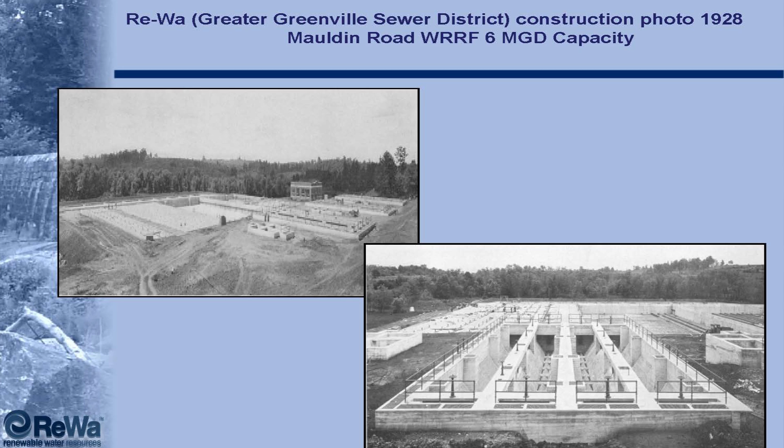Come on guys, stop looking at your phone, give me an answer, how much? $750,000? Okay, that's pretty good. All right, who's next? No, you can't go. Are we down? What were you at? Is anybody in here, we had one more engineering firm. The gentleman on the phone trying to figure out the answer, you can't look this up on Google, sir. Now, girls, give us the correct answer. $4.25 million? We're not going shopping, girls. 1.25? Guess what, America, who was close is 625,000. Give the prize to them. All right, awesome, that was the cost.

Everybody kind of knows where we're at. We're in the upstate, we're in 5 counties. We have 8 different treatment facilities and 62 pump stations.

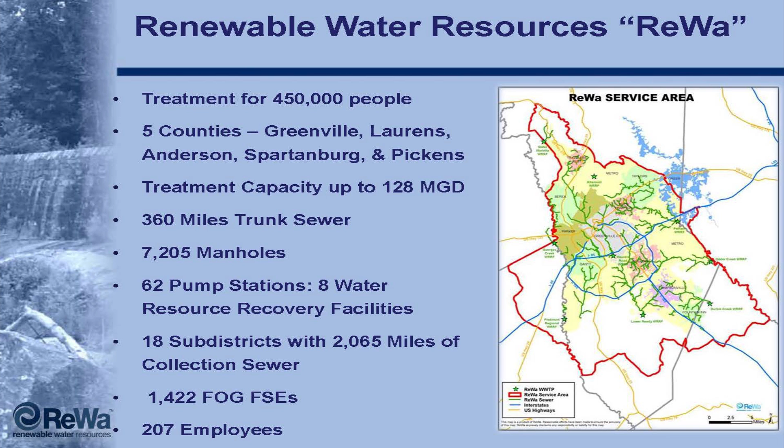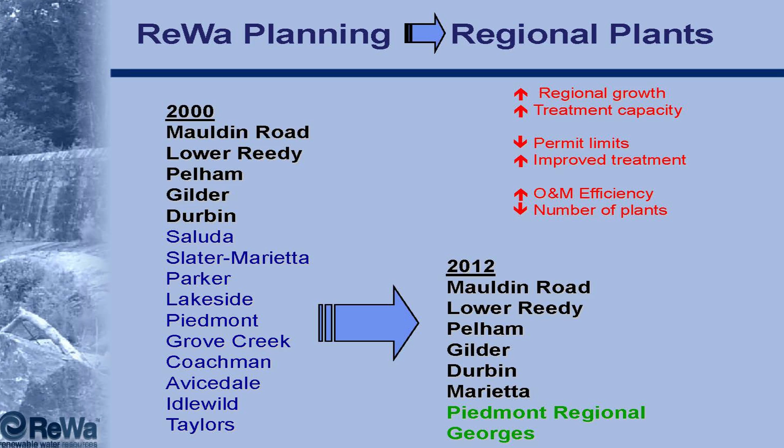I can skip all this because you know who we are. A little bit of our regional planning I will talk about. In 2000, we had all these facilities. If we had a little list over here of the 90s, you would see it all the way down to the floor, because in the 80s we were 38 facilities, but we regionalized these facilities. In 2012, we're down to 8. And I wish we could pump that one Marietta plant, but we cannot at this time.

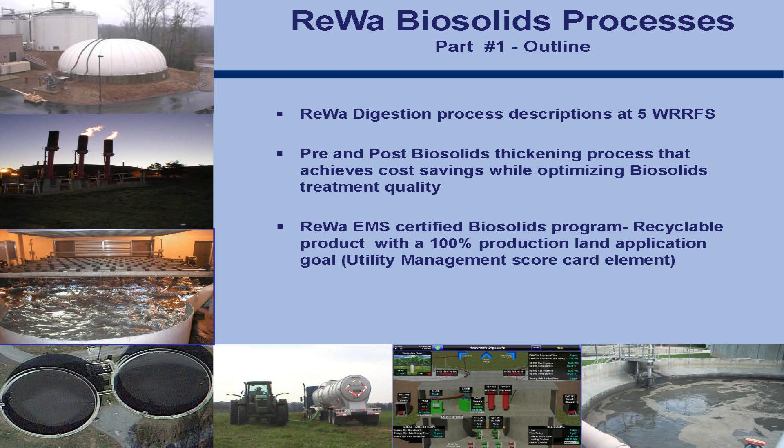So we're going to talk about digestion and what we have, and we're going to talk about the 5 facilities where we have anaerobic digestion, okay? We're going to talk about thickening, how it's important to us and why we do it for the savings.

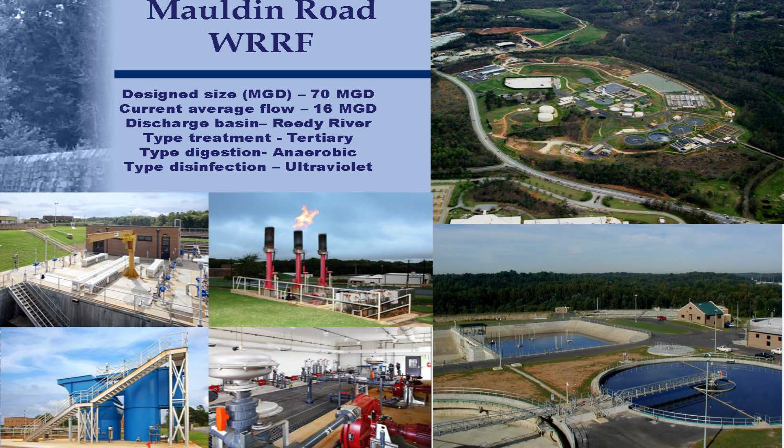Stormwater, exactly. And guess what else they collect? Grit, yes, the magic of grit and what it does. And we'll see that in just a minute. But at this facility, we have UV treatment. It was the first biological nutrient plant in the state for phosphorus. And we're going to look at some of the things there.

But first, we're going to talk about anaerobic digestion, which was put in the 40s at this plant. There were 4 digesters built. We're still using those tanks, and you can see those tanks. We have got our money out of those tanks. I just wanted you to know. That's when they really built tanks, by the way. And then we had 2 additional anaerobic digesters that were put in the 70s.

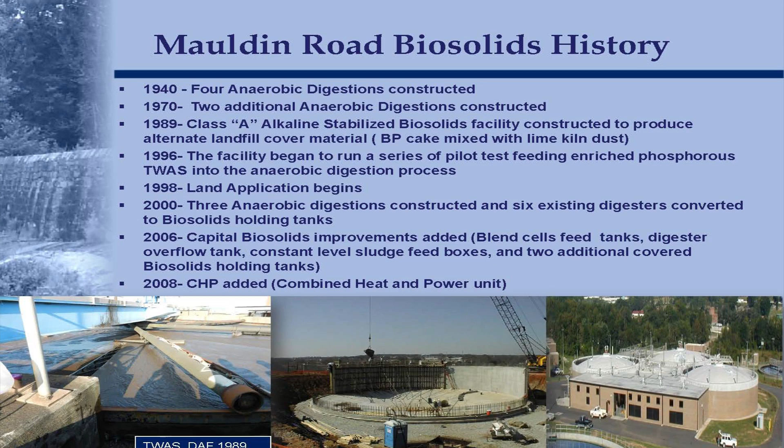And then all of a sudden, during the 80s, there was a huge phosphorus problem. There were big algae blooms in Lake Greenwood, and what happened then was, hey, guess where it comes from? It comes from the Reedy branch and Saluda branch running to Lake Greenwood. So Lake Greenwood had these algae blooms, and what was mandated was that we went to biological phosphorus or chemical phosphorus removal at the Mauldin Road facility.

Our primary clarifier sludge went over to our digester, and our thickened waste activated sludge from our biological membranes went to a DAF unit. Why did it go to a DAF unit? It's biological phosphorus removal. It has to be aerated. So if you'll see the picture right here, you could see that these were the DAF units that we floated the TWAS on, we pressed them out, and we mixed them with lime kiln dust. Okay? We made an A-class product.

That A-class product was used at the landfill for daily cover, which was somewhat problematic at times, but we had an A-class that was with the lime eating through everything we owned and the employees.

No, I'm just kidding with you. That was a joke. All right.

So if we go on with this, those 2 things are separated. So we took the primary clarifier sludge that went into the anaerobic digester that became biosolids, and we started the land application program. We were doing this at Durbin. You'll see the facility in a minute. So in '98, we started land applying that. We had a B-class land application on this side. We had an A-class on the other side with the TWAS.

So what happened during that time is we said, look, what we really need to do is look at whether we can put TWAS in an anaerobic digester and have that release of a side stream of phosphorus back to this facility. And we did a series of testing for about 6 months, and it really worked well.

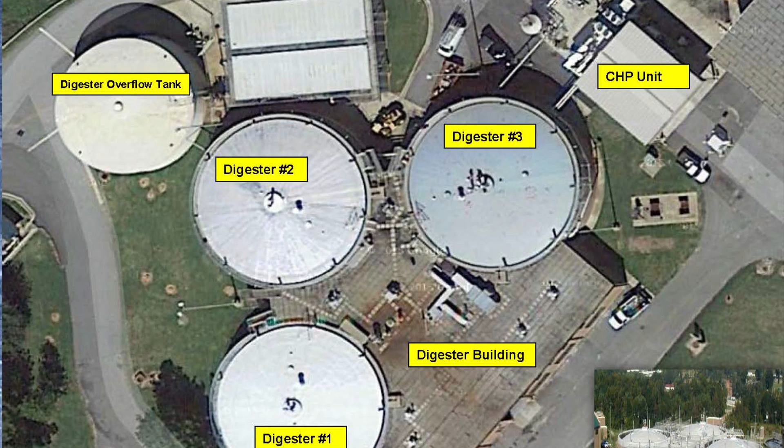So in 2000, we built 3 brand new anaerobic digesters that really, thank you Hazen and Sawyer, because you're going to see something awesome in a minute. They're going to shine on this one little building design that is awesome, and it's actually right there in your corner, right here. The building contains the digesters, the pumps, the heat exchangers. Everything is in that building, even the GBTs. Really neat design, and there's the digesters being built.

So in 2006, we did even more for the capital improvements. Blend cells were added, overflow tanks. We made the digesters constant level digesters, even though they still had the floating lid. And we did 2 additional biosolids holding tanks. In 2008, we got tired of burning off that gas. There were funds available through shovel-ready projects, and guess what? CHP was born. All right.

So just a little look at Mauldin Road at the headworks. We have the primary clarifier sludge, as I said before, that currently goes into the anaerobic digester. We have the waste activated sludge, thickened, of course, that goes into the digester. Then we thicken coming out, and we'll explain a little bit of that in a minute, to biosolids, and 100% land application is what we try for at all our facilities. And we're doing that again now after the PCB, and we'll talk about a little bit of that.

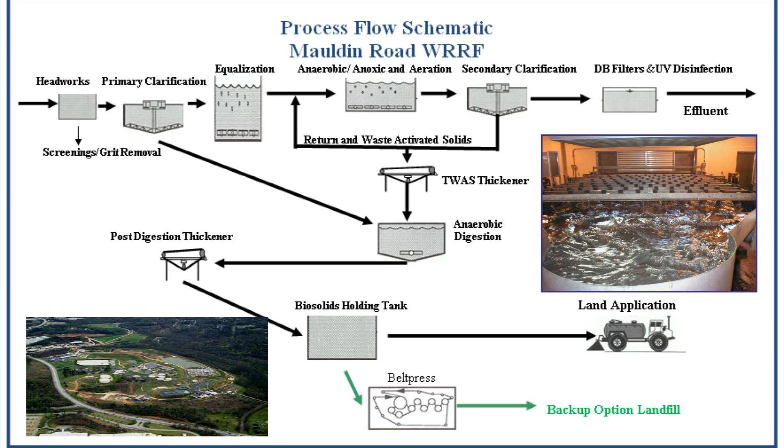So you can see from above, here's the Mauldin Road facility. This side's active. Here's your digester complex. A little bit up close, here's your digesters. Now we have the addition of the CHP. We'll see that in a second. Here's your building. It contains everything. And then we have a constant flow that comes off of these digesters if they're active, that comes to the overflow tank, is thickened, and then goes to the biosolids holding tanks. And here are our digester feed blend cells that we do different things with.

And those are actually designed because we had some issues with foaming and loading, and we thought, is it the grease, is it this, or is it that? And we'll go on with that story in just a second. So here's the biosolid storage we added at 5 million gallons, covered biosolid storage, and here's the 1940 tanks that are still in existence that we use for backup.

During the winter, if we're land applying, it gets wet, guess why? We don't want to run the belt press. Does anybody take a wild guess of running the belt press versus land application, what it costs? What would you say? How much did it cost? No,

in some scenarios, it's 50% more. That's a lot of money, taking it to the landfill, pressing it. That time, the trouble, the upkeep of the belt press, is when you don't have that expense. We have all the land, and we'll go through with that too. So here's the old tanks. Here's the primaries that were built in the 70s, and the in-ground bunker secondaries that were from the 40s.

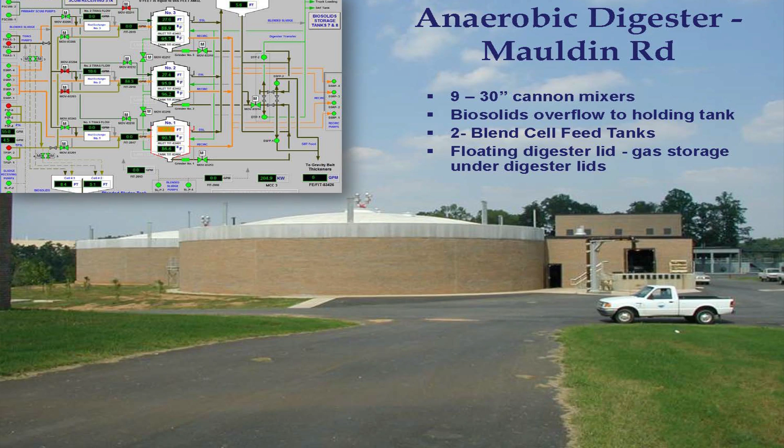It's really good that they run and they're designed to run at X amount, but how about when you get X, Y, Z, A, B, C, and D all at one time? That initial flush of that huge line, when you have these huge rains, is going to push some of that grit over into the primary clarifier, and guess where it's going to end up? Either here or the holding tank. Depends on what's better mixed, right?

So we have the floating lid. The gas storage is under these lids at this facility. Like I said, we have the cannons, the big bubble cannons that actually take up with the gas a big huge bubble, and they come up to the top. And here you can see a little bit of that at these levels.

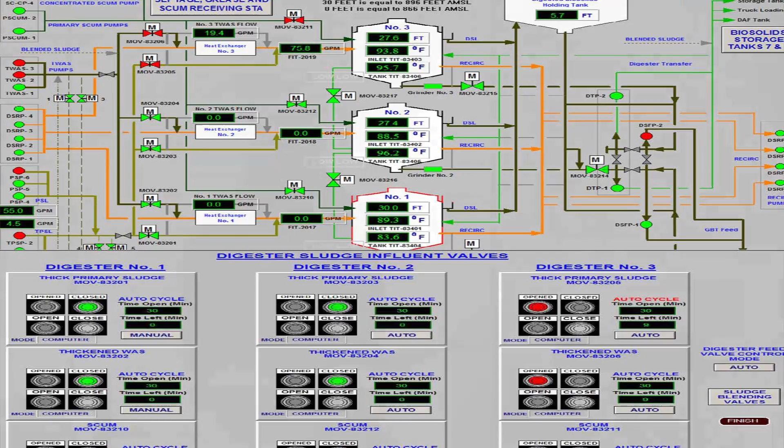Here's our digester SCADA. This is what we're looking at, and it looks easy, doesn't it? It really is. It's not complex. You know why it looks easy and how it is easy? Nobody ever does anything to it. It just runs. Because right here is our feed cycles for the digesters. And you put them on how many minutes you want it fed, if it was primary clarifier sludge or scum, and guess what? I don't think these things have been changed in the past 10 years, because they run so well. And there's 2 running now, not 3. I took this picture when there were actually 3 running.

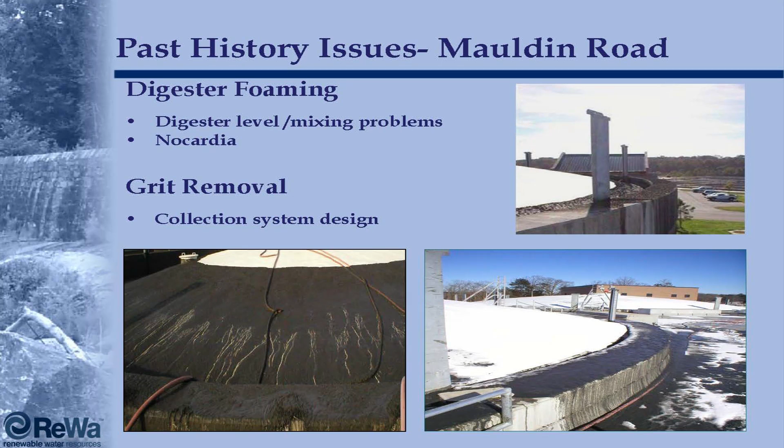Past history issues. The big thing was the level and the foaming. Okay? We can sit here and cry. We can sit here and roll on the floor about foam all we want. It's just one of those issues. But when we first got the new cannons, that was the thing. Because the operators were scared of the level that the digester went up, and they were in tune to run that digester at more of a low level. And guess what? The cannons, they were a little bit under or right at the cannons, and they weren't great mixing. They were just foam generators. And all of a sudden what they wanted to do was go cut off the mixing, because guess what? It was foaming everywhere. That was a nice snow picture, wasn't it? But what would happen is we would have that issue.

The other thing is Nocardia. Nocardia in your biological treatment will devastate your digester. We had a lot of issues with that. In fact, before the PCB issues, we had grease haulers come in droves, and they would put that into the headworks, and guess what? That grease would travel down to the primary clarifier, kind of go over the weirs of the primary clarifier, because the scum beach couldn't handle it. It goes out to the biological treatment, and guess what? We would develop scum during some times of the year, and it would be Nocardia. And that Nocardia would be fed to the digesters, and you would have issues. Those are the issues.

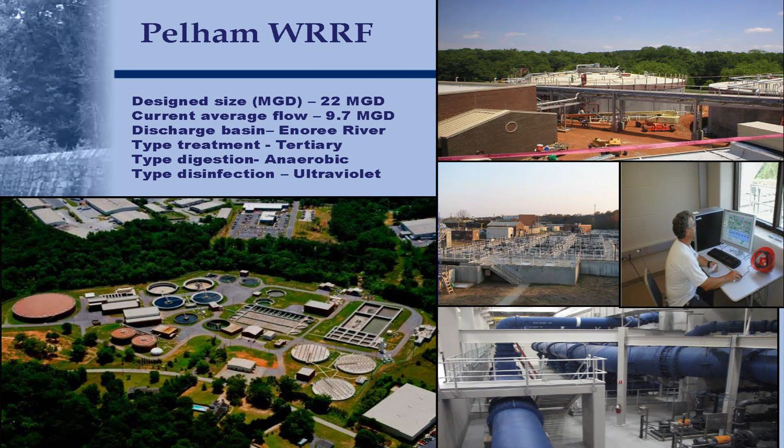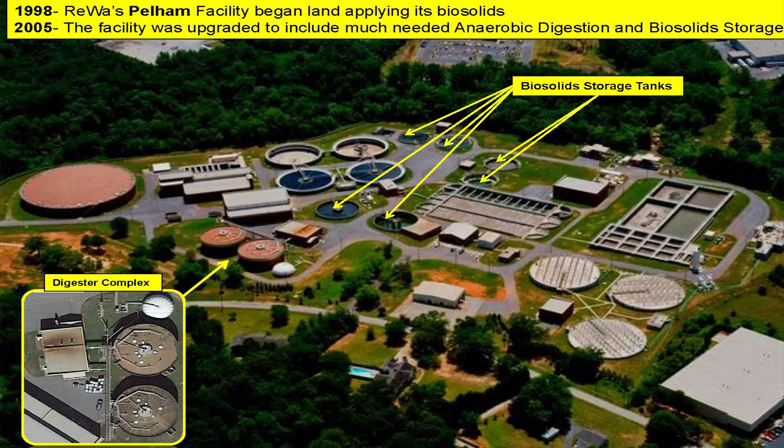So the Pelham facility is our second largest facility at 22 MGD. It's close to 10 now on the average. It's located on the Enoree. It's not biological phosphorus. Tertiary treatment, anaerobic digestion, and UV treatment. Here's a picture of our biosolids holding tank and our digester complex. In 1998, there was aerobic digestion, and we started our land application process here as well with belt press backup. In 2005, the plant was upgraded to include new primary clarifiers, anaerobic digestion, and biosolids holding tanks.

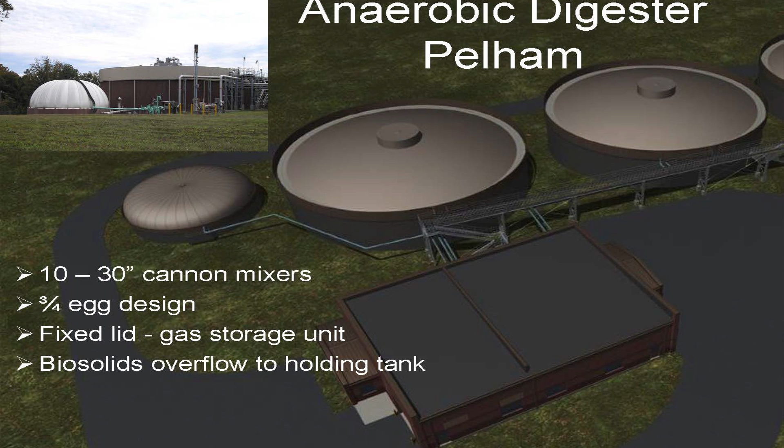So we learned from our foaming issues at Malden. So a lot of little things: we put fixed lids in. We had a 3/4 egg design here. Biosolids overflow with that fixed box, same thing we put at Malden. We overflow to the biosolids holding tank. And there you see what we just talked about, one of those nice membranes.

And I said yesterday, you didn't say it, but I'll say it today. We were scared. The first thing I said is somebody's going to take a gun and somebody's going to blow us all up. But Jared did explain that you can't do that, okay? But that's what we thought. And Jared, by the way, if anybody asks you where you work, tell them you work at the jewelry store. That'd be awesome. Yeah. No, the flaming arrow would be safe too, wouldn't it, Jared? Yeah, it would. There's protective membranes over there.

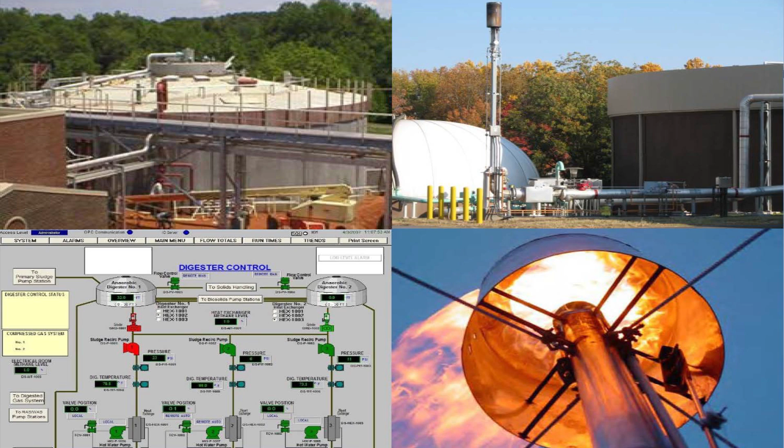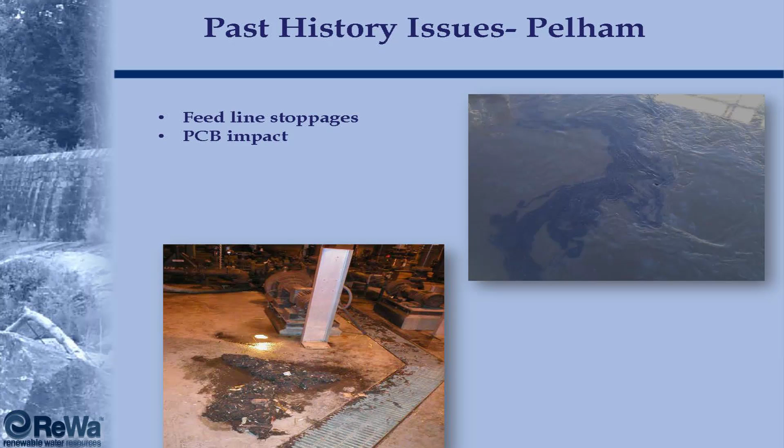Okay, here's a little shot of the SCADA system and the plant control there, and a few other shots of your waste flare and the top of your digester fixed lids, the way they look. All right, past history. You have stoppages at times when you have screening issues. This facility has been one where we have fine screens up front. Guess what they were doing? Large rainfalls, they were jumping the gate, they were not adjusted. Screenings go back into the primary clarifier, go into the anaerobic digester, and there's lines. And then you have the magical black fairy dust that comes in and you didn't know where it came from.

But everybody's heard of our PCB issue with the hauler that came in with his nice little truck and backed up to some nice established restaurant and said, "Hey, sir, could we pump out your grease trap?" And they said, "Yeah, go ahead and pump it out." And he would come with a nice load of PCBs and he would blow it out into the sewer line and they would magically float down to our plant.

But here's what happened. We put frac tanks at Mauldin Road. Everything goes to Mauldin Road. We would test each frac tank before we released the grease right into the digester. So guess what? The grease was not going to the primary anymore. It was going directly into the digester. So Mauldin Road always had scum, right? Seasonal scum. As soon as we did this at the Mauldin Road facility and took that grease load directly to the digesters, they have not foamed. The tops of the aeration basin have been just crispy white, like they should be. So eliminating grease from the biological system has done wonders there.

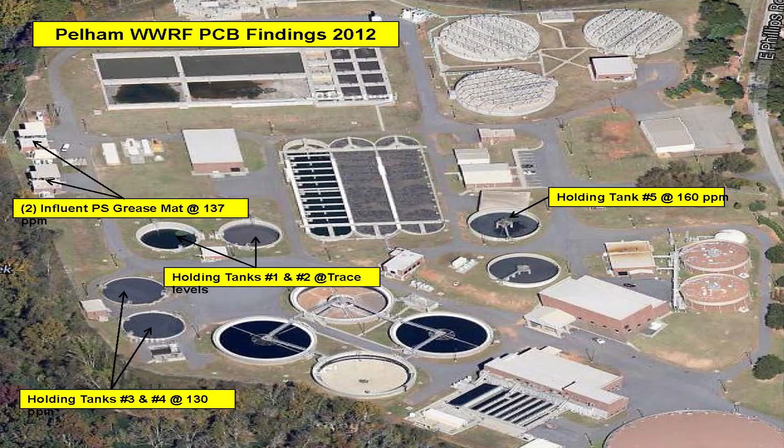But I need to get back on the PCB impact here. We actually saw the day the parts came in, and they were over 500,000 parts per million that we sampled on top of the basin. By the time they got to the biosolids, we had over 137, 160, 130 in the tank. The grease mat was around 137. The issue here was we could not go to an ordinary landfill. We had to go to Alabama. Alabama loves us for this. Our estimated cost that we tried to show the insurance company was $9 million at the 3 facilities this happened to in the upstate.

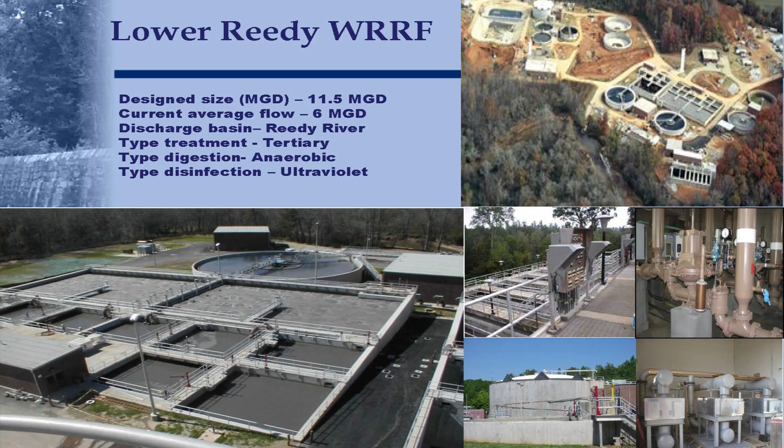Okay. Lower Reedy, 3rd largest plant, 11.5, 6 million. B&V, is anybody from B&V in here? Okay. Awesome biological treatment designed for phosphorus. We have several ways: UCT, VIP, modified UCT, you name it, we could probably do it at this facility because of the design and the piping and layout and the 5 zones before the basin. The deep basin does a wonderful job. Their phosphorus, since startup to today, is under 0.2, no chemicals. Awesome job on that design.

Going back to this, 2004, we started land applying those biosolids. In 2006, we added 60 days of storage.

Does anybody see anything special about the digester system right here? Anything out of the ordinary? Anyone? The cover, yes, what does the cover look like? A prince's crown, right, girls? Yeah, I know you're going to say that. No, that is the one thing. I was going to say Burger King last. There's only one.

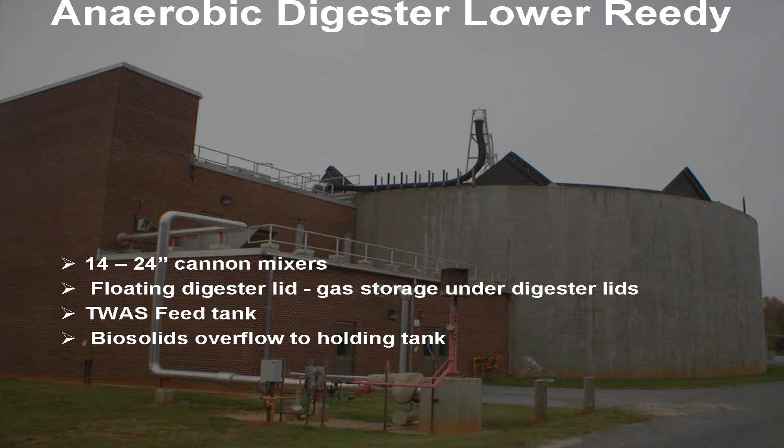There's only one. But being only one, we'll say this, the digester was a little bit over-designed on the cannon mixers, and we're about to clean those bad boys out, aren't we, Hazen? Yes, we are. Because there's some issues there where we have screenings as well.

The digester hadn't been cleaned out. It needs cleaning out. We need to consider build out of that plant and building another digester and looking at doing so. The digester, a little bit strange thing there, is a TWAS tank added.

At Mauldin Road, we would add that biological TWAS with the loaded phosphorus directly in, maybe to lock up some of those enzymes. Here, it was more of sitting in a tank and some of it releases more before it goes into the digester. They have a little bit more phosphorus in their side stream, but it does a good job at the Lower Reedy facility.

And we did the overflow tank as well. But here's the problem at Lower Reedy, this struvite. We need to harvest it right away. But anyway, our last director was not a big fan of the harvesting, but maybe our new director is, who knows.

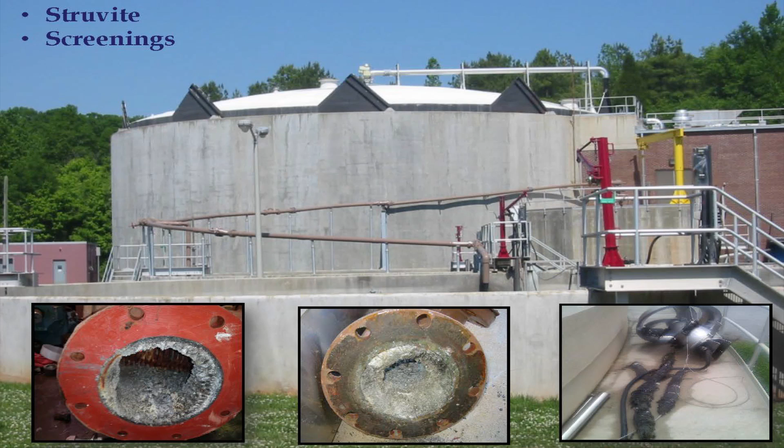But here was the feed box that come down and it went underground. The overflow box comes down and it went to these 2 tanks that we're looking at. And what happened was this magical crystal that you could form, which we could grow this as diamonds, but we cannot, started doing this to a lot of the lines. And because we had this stagnant line that stayed full sometimes, it would attach to the cell walls.

So what we had to do, we had to go back and say, do we do a chemical clean? Or do we take out the piping? What do we do? So the logical thing was coming out of the digester, added this gravity flow line, and so we're flowing all the time, and that's what we did for these 2 pipe locations here for the struvite. And of course, I talked about the screenings, a lot of that issues because the digesters have never been cleaned out.

Gilder Creek, a lot of good things here I'm going to talk about. This is 11.3. This is on, anybody ever been on Woodruff Road in Greenville? You should visit there at Christmas every year. But anyway, it's out toward that way on the bottom side of Woodruff Road where all the build out and the growth is. Somebody tell me what this was called?

What kind of design is this called for this type of carousel? The folded hot dog. In 1998, I remember it like it was yesterday because I was there when they built it. I saw them building this. They had the folded hot dog. It was one of the innovative plants that was 75% government funded.

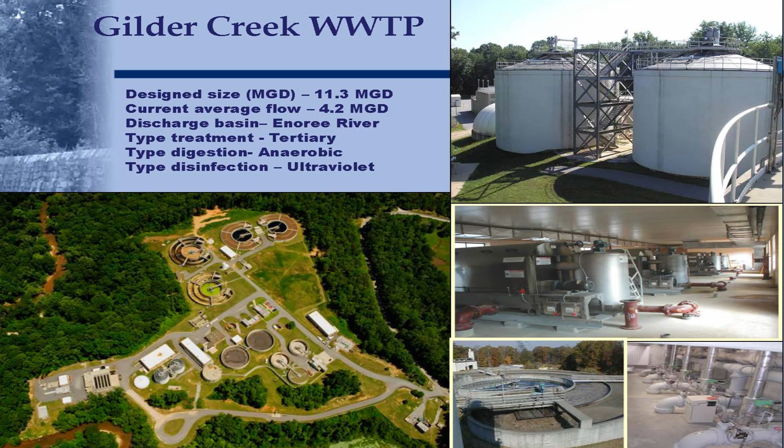And we're going to show you another one of those in just a minute. But they built this out and they put in a great system here for the solids.

2005, Gilder Creek was upgraded with new anaerobic digesters. Biosolids land application shortly after. Here's our storage tanks. Here's our digester complex.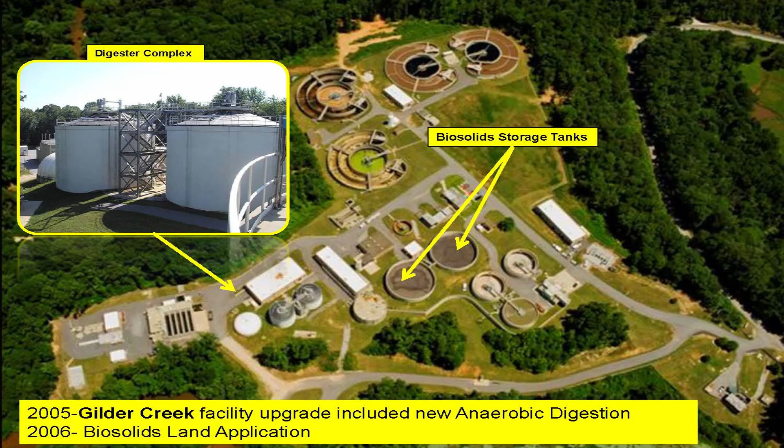Really like these digesters. They're a little bit more narrow and a little bit more deeper, a lot in the ground. 6 30-inch cannons. They got an inside transfer pump instead of the constant overflow. Sealed partial shell designed with Crom tanks. We have the gas storage unit here as well.

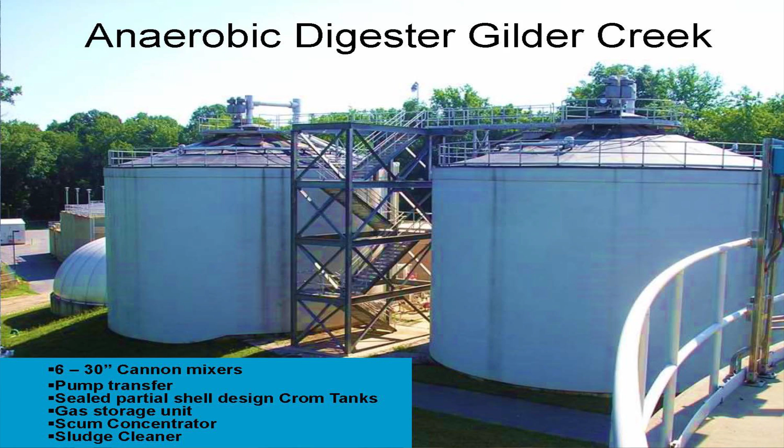Has done a great job. No problems whatsoever. Very low maintenance. The two winners on this are the scum concentrator and the sludge cleaner. So if you got $500,000 that you got to put in the job, it's well worth it.

We can sit here and you can talk to owners all you want to. Hey, put $500,000 in something. I think it's well worth it. And I'll explain a little bit of that. The thing here with the digester, a little bit tall, narrow, a little bit deeper at 55 feet. Here's a little construction picture there.

Here's a picture of the plant control systems on the digesters. Here's your membrane, here's the sludge cleaners, and this is what they do. Through the primary sludge, they take all that stuff out.

It's nice, you need to take some of this home. It smells good. If you put it in the kitchen, no flies will be in the living room, I guarantee you, okay?

But the winner, I think, is the scum concentrator. How many folks out there see primary clarifiers in wastewater where you're spraying water in the primary or secondary clarifiers to move that trough and move that junk out? Well, you want to put all that water in your digester, steal the capacity, and dilute your digester down, meaning more heating that you'll have to do.

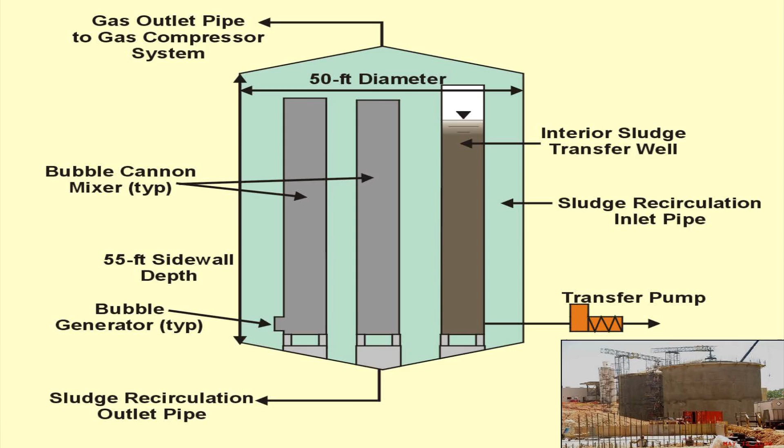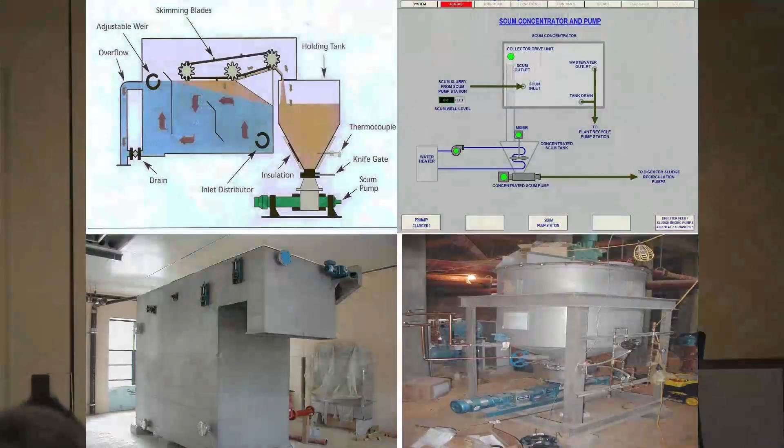Well, you know what? Concentrate it. This is really a winner because all the scum goes to this concentrator. The grease floats up top, it goes to a tank here in the basement, and you set it to slowly feed the digester at the pace. It's heated up already, so you don't have to heat it. Small heating unit there. It was really one of the winners with the scum concentrator because the biosolids at this facility are very clean coming out.

Not as clean as the membrane plant though. We'll talk about that in just a second.

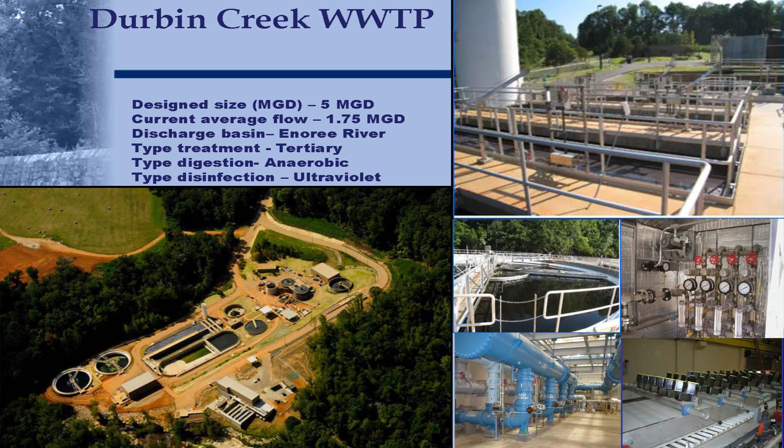Durbin Creek, near and dear to my heart. Durbin Creek was our first land application site in 1988, folks. Yes, 1988, it was a farm there. It's 5 million, it's 1.75 today. 1988, first permitted land application site.

And who can tell me what the name of this is? Jim, you'll have to do it. Nobody here can. What was the name of these? Boat clarifier. The inner channel ones are boat clarifiers. The salespeople say boat, I don't know why. Do you see the boat anywhere? I'm just kidding, but here is actually the clarifier.

And we added turning vanes because of velocity issues. Plant did a really good job, but the plant was an energy monster because of the brush aerators and the velocity you would have to take through the aeration system.

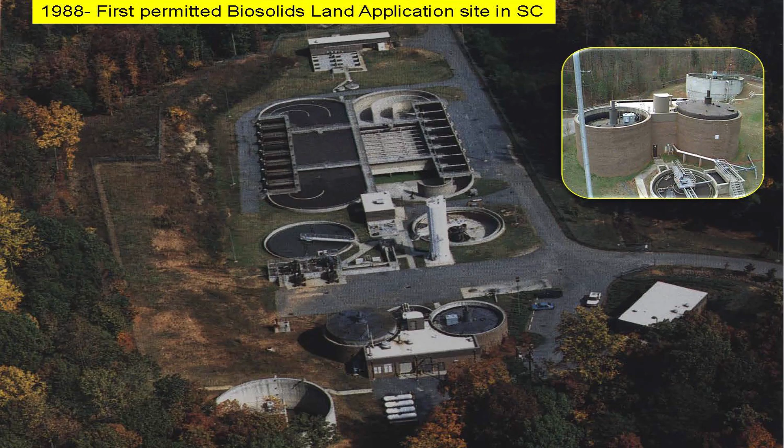Primary clarifiers, digester, and holding tank, this was all put in place. This actual picture is from the original plant. Here's the land site at that time, 5 fields. See the delightful hay that we have, Class B product, great hay. Had to sample that hay.

You really have to check the nitrates in that hay so it's not poisonous to farm animals. B-class material. So we were doing this already. For us, we saw the money, the savings, the manpower, the labor, and the equipment, and said hey, this really looks great. Let's throw our eggs in one basket. Can we? But for the money at 50%, do you do that? It's a good fight there.

So what we added in 2007 was we took the gravity thickener and turned it into a TWAS holding tank, so we could waste during the weekend without having to worry about different man hours, and that would be a constant feed.

The only thing is, TWAS stored smells delicious if anybody's never smelled any. It's not as bad as pure grease, but it's pretty bad.

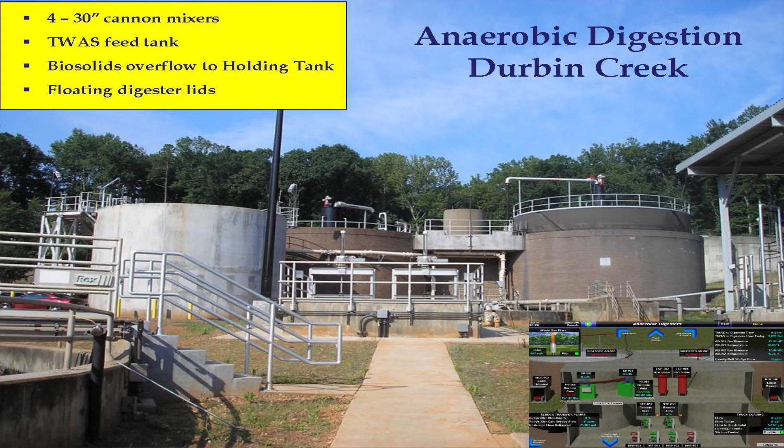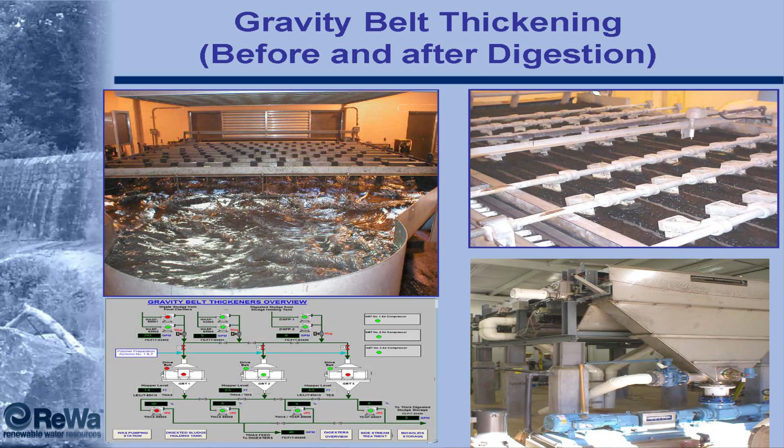And then with this we had the overflow, constant overflow was added, and the thickening building was added. You can see, look at the inner channel clarifier, it used to take 2 of these to run before we hit the plant out. Look, now it's a quarter, and we put in anoxic zones. Plant does really good on biological phosphorus removal, and we didn't mean to, because of the oversized clarifiers.

So anaerobic digestion at Durbin Creek, four cannon mixers, and this was kind of not the rule of thumb, as these folks up here can tell you, that you really don't put anaerobic digestion in at a plant that's only a couple million gallons.

Because of different things that happen, sometimes your TWAS outweighs your primary. And when that happens, guess what, we have too much turnover because of the cannons in here, and this facility still has the foam issues. So we're fighting this, and a lot of the flow is being taken off this plant, so we're looking at different options at the Durbin Creek plant.

All right, why do we thicken? We thicken, just like I said before, because we want to concentrate on thickening going into the digester. And the reason we do is because we want the available space that goes into the digester so the detention time will be higher, so we could take the food, respond there, and make gas, break down the solids.

So if you look at the primary clarifiers, something that everyone has seen over the years with primary clarifiers, during the winter, the solids concentration can be as high as 6 or 7%.

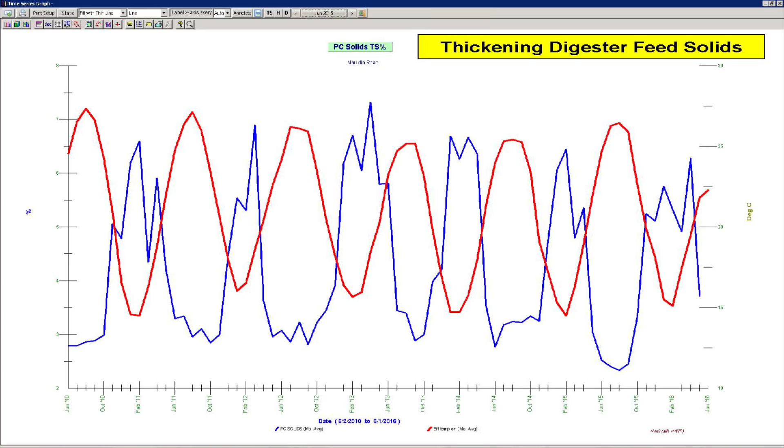During the summer, when temperatures are high, higher temperature means thinner solids. This varies during the year, so we have to compensate with what we're putting in with our TWAS.

We have mostly GBTs that thicken before and thicken afterwards. We do have side stream loading that comes with thickening afterwards, but there's a lot of savings there. We also have a facility with a rotary drum thickener, a very clean application. Look at the floor, it stays as clean as it could be.

But nobody knows what the filtrate rate is because it's hidden, right? No, you put a solids meter in and you know what it is. So both of these units do very good for us. We have different types of GBTs, and there's our RDT.

Why do we thicken on the backside? Because of the cost. At 2%, most of our digesters are coming off at 2%. We want to go into the holding tank at 6%, because it breaks even further down when we store. When we store this material at 6% coming off the GBTs, guess what? We'll do good to be at 4%.

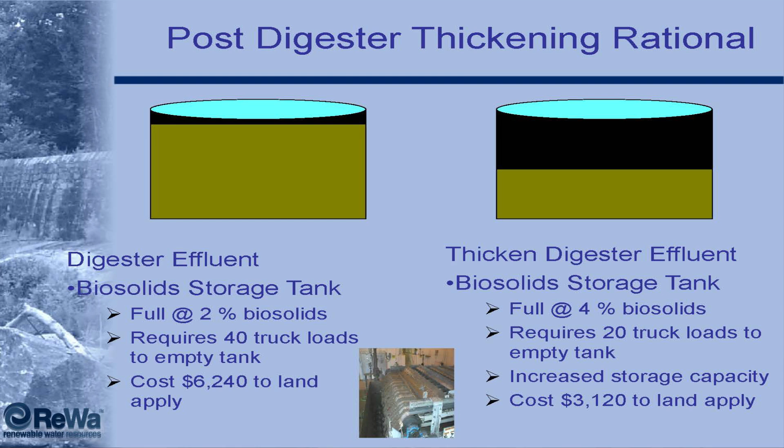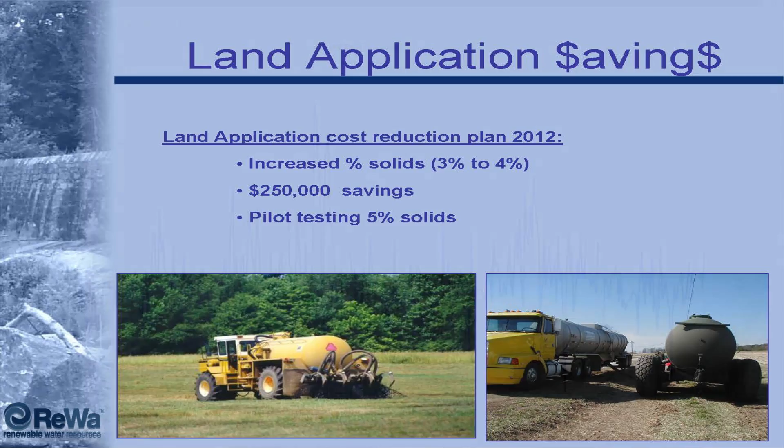We did this as a scorecard element of the utility management system, and the goal was to go to 3 to 4% biosolids, which was a savings of $250,000. We pilot tested at 5%, and that was a little bit too heavy. You can see our TWAS feed is around close to 6% that feeds into the digester. We kind of range between 5 and 6.

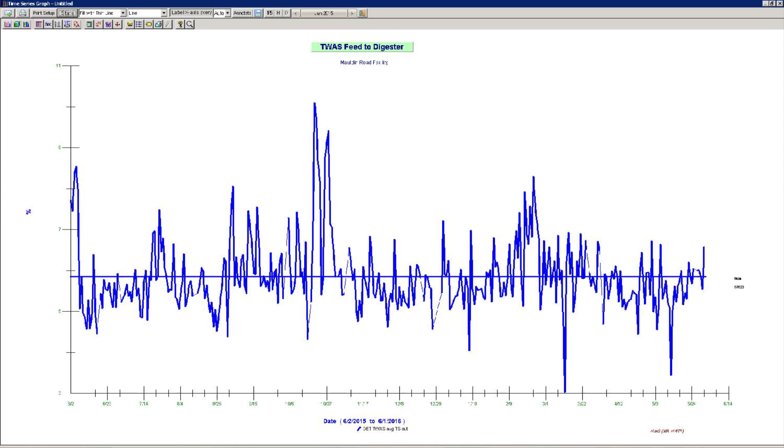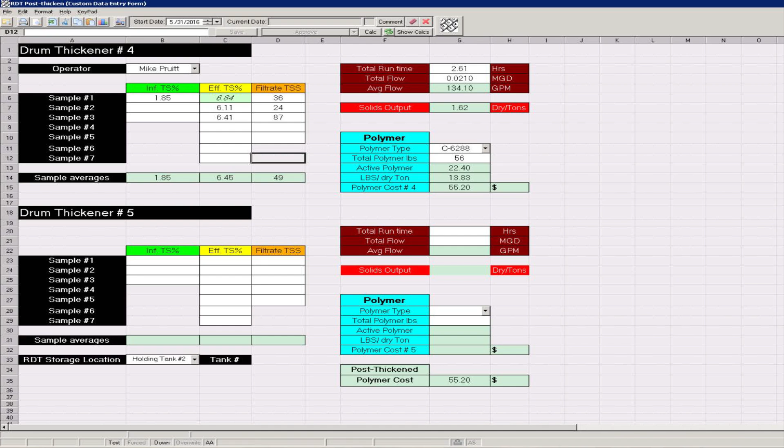We developed during this time elements that every facility had to track on our WIMS program. What's your solids going in? What's your samples average through the day? What was your efficiency, your output, your polymer type, and your costs? So we had all this zeroed in to see who was doing better.

It's kind of like a competition between all the plants, right? And folks did their best to minimize the polymer and up the efficiency. But not only that, everybody learned a little bit more about what they were putting into their holding tanks for biosolids.

60-day storage was mandated as our upgrade, so we would have more room during the wintertime when it rained.

We have a National Biosolids Partnership EMS program. In this, every time you do anything in the plant and you touch solids, guess what? There's a procedure for it. Every facility has a procedure for everything. And you say, wow, how do you do all that? Procedure is plan, do, check, act.

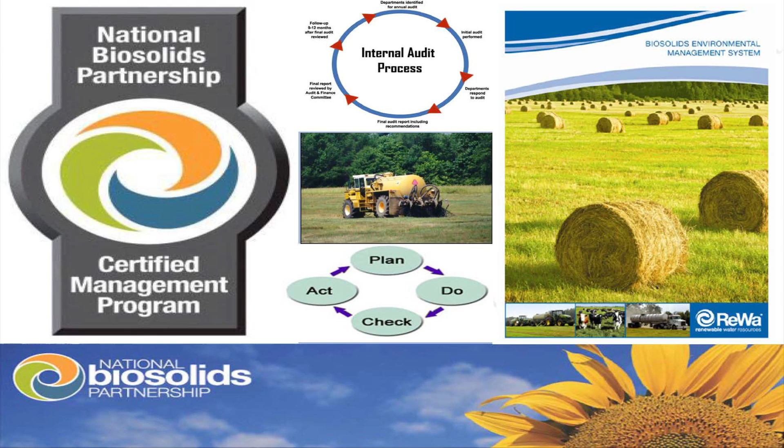It's been amazing, because it's taught everybody a lot about what they do every day. But not only that, there's training and interviews from the director all the way down to the utility worker. They know, because they turn over the little name tag, exactly what the biosolids process is, since everybody's interviewed. We have different randomly selected people audited through our system to know what that system is. We have an internal audit with a team and an external audit that comes in every year with improvements.

We have over 7,800 acres permitted across 4 different counties. Our largest farm is 610 acres, and our smallest is 10.

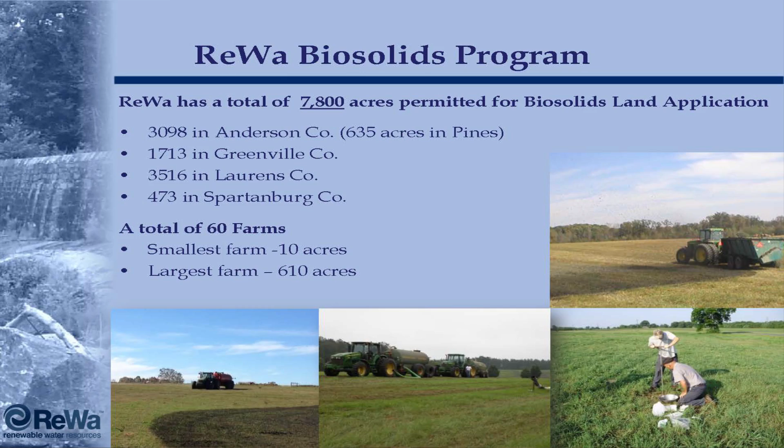All our SCADA systems are interfaced into one program. We made this for our biosolids manager so he could see what was going on at all the tank levels and know exactly where to go. Before, he'd be on the phone with somebody who'd say, 'yeah, my tank is filled up,' but his tank's not filled up. Now he doesn't have to call anyone, he just looks at this page and knows exactly where to go. You can see that the membrane thickening process we're going to talk about is pretty good this day, at 3.5%.

So, CHP, Mauldin Road. We got tired of all the wasted gas, so we moved into looking at putting those costs back to our grid, because Duke Power is so good and works with you.

Raise your hand if you think Duke Power is a great entity that works with you every day. Raise your hand. Okay, no, we had options. We really chose to put it back because of different things.

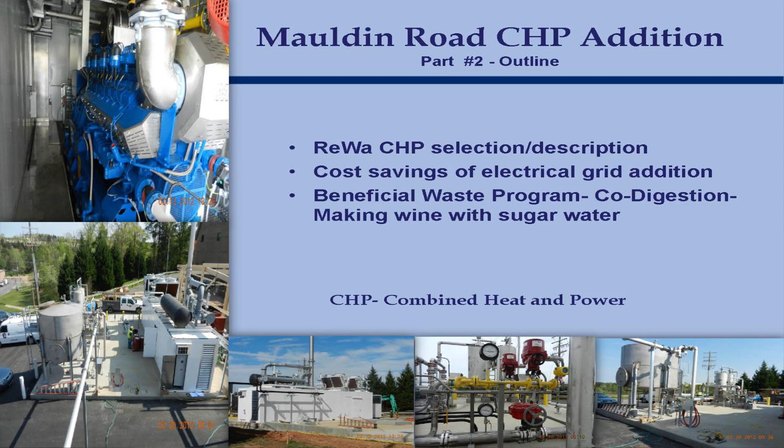And then we're going to talk about making some nice wine. Don't get excited, we're not going to make any today.

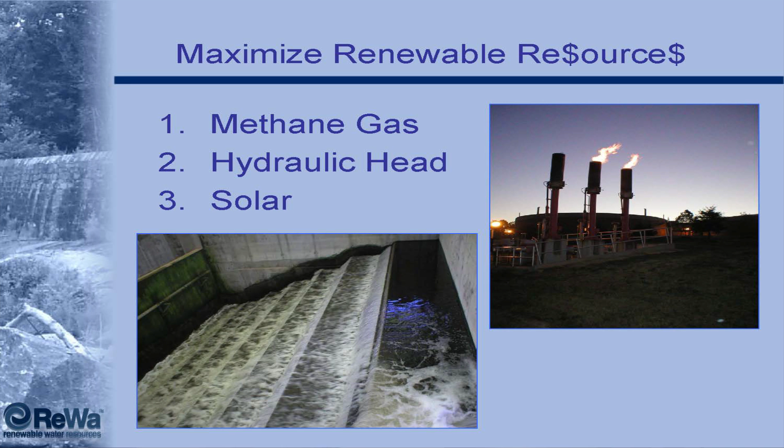If we look at those treatment costs, we talked about biosolids, the top of the 4. Electricity is the second for our field. So we looked at methane, the hydraulic head from a lot of falls of the effluent, and we looked at solar. Solar's back, by the way, because Duke Energy is offering incentives for solar, so that's being looked at for some of our facilities. Methane was the way to go.

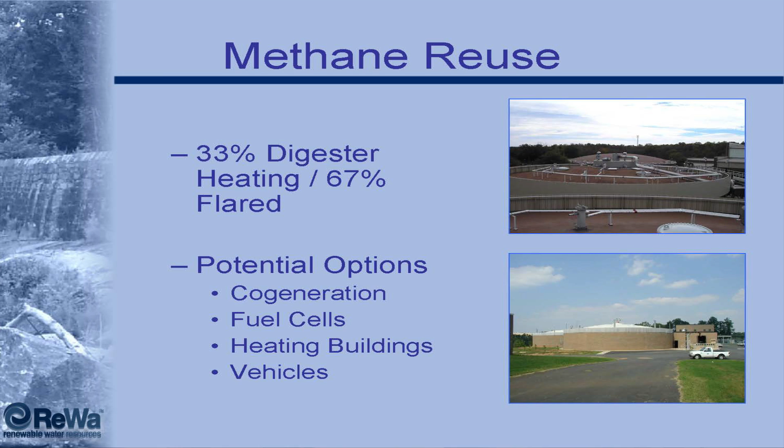Everybody knows that it takes methane to heat your digester. Everybody's been doing this for many years, about 33% here at Mauldin Road. So we looked at cogeneration, fuel cells, heating buildings. Everybody thought the vehicle thing would be the way to go.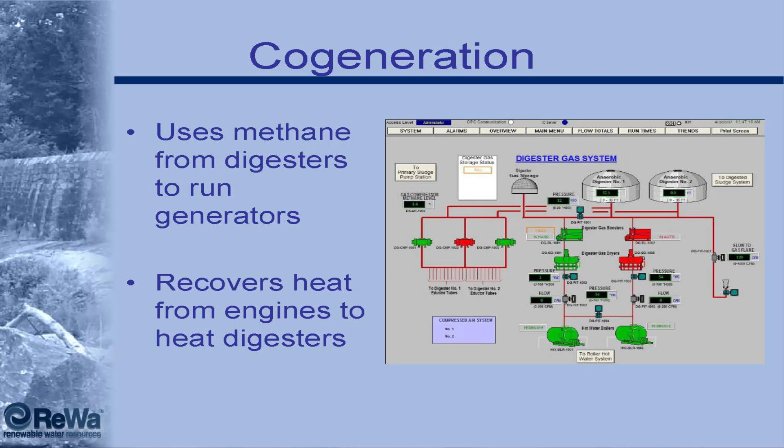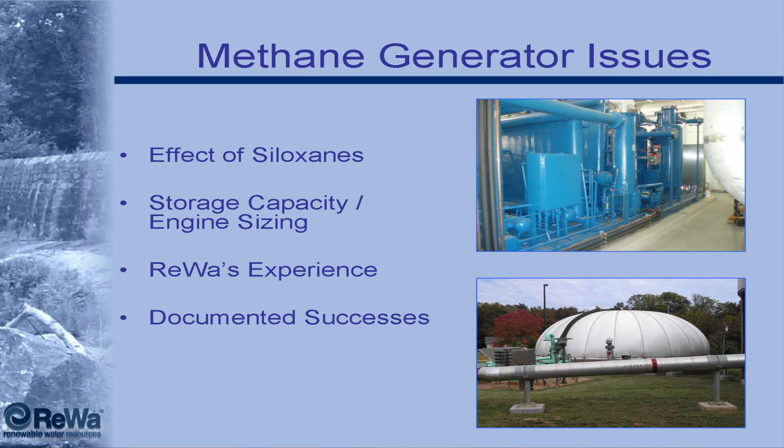It was not, took a lot of money. So looking at this, we looked at the heat recovery of cogeneration. We looked at the effects of siloxanes. And girls, you know, siloxanes come from personal care products, we all know that.

So we shut down the system. There was no working there after 3 years. So we had documented success. We called all these folks, asked them what they were doing, and everybody who had success was more with the spark ignited combustion engine. We had a landfill next door.

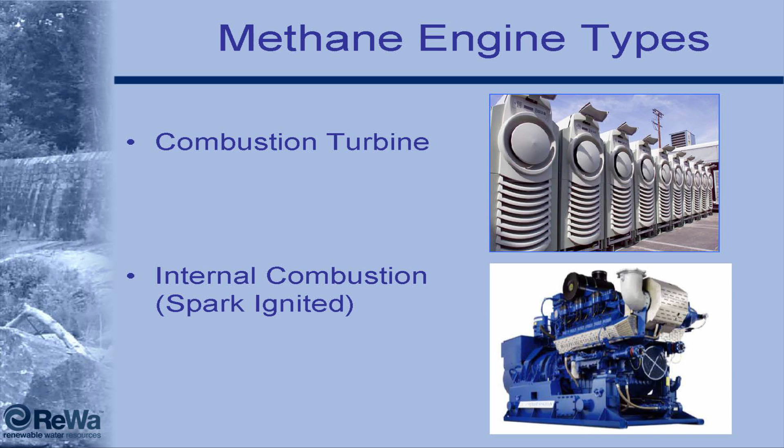The landfill said, hey, we remember working with you. You didn't do it, yeah, but you know, we got this new gas unit. Come join us, be a part of the party. Let's make energy, let's reduce carbon footprint. They said, no, thank you.

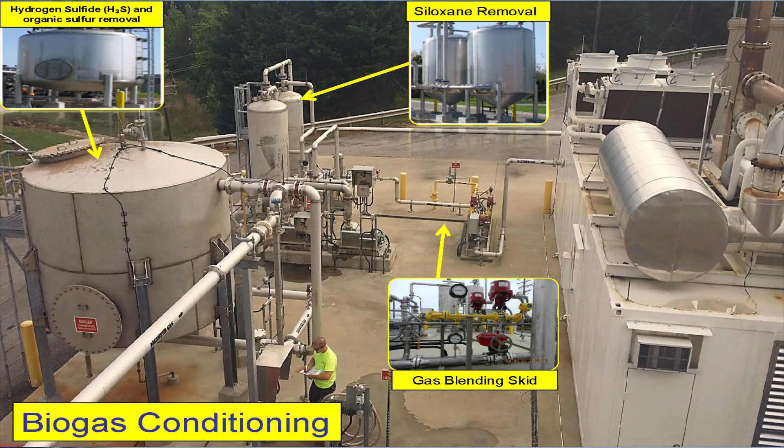So we moved on. And we said, okay, we got this project. Here it is. Here's our hydrogen sulfide removal on our gas conditioning, goes through here. Siloxane removal with our carbon. And here's our engine generator. We also put in a gas blend unit for if anytime we would like to do LP gas and team up with Piedmont Gas, but that hadn't folded out yet either.

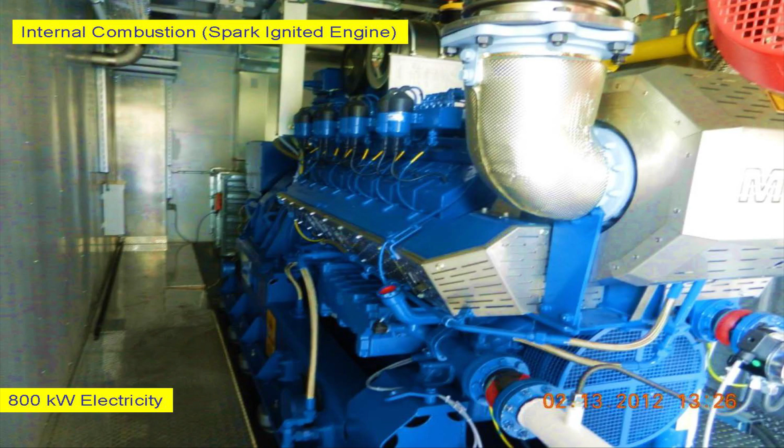Maybe one day. Here's the engine at 800 kW. But if you look at the maintenance costs, a lot of folks say, yeah, let's do this. Look at the maintenance costs, it's pretty intensive, okay? But when you come down to the electrical cost, the difference is around $250,000, let's say, a year, and what you're saving. So there is a great savings.

We're not putting all that methane and wasting it. We're putting it back to our own grid. The problem here is if you were in Europe, this would be killer, because if you pay 26 cents or whatever for energy, it'd be different. We're paying 6.5. We're reducing that down to 4.5.

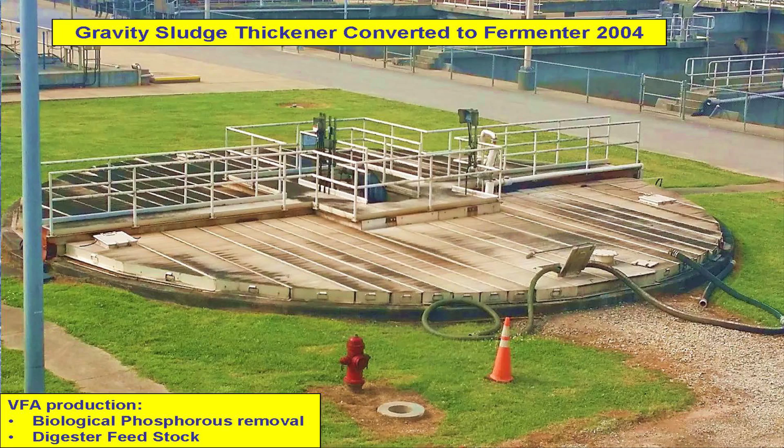One of the ways we're doing this, by making our gas, we started taking in sugar water in the early 2000s, to make VFAs for our biological phosphorus system. We converted this old gravity thickener into doing that. We put sugar water in there, and guess what, it fermented and turned to wine.

So what we said is, well, you know what, we could do this there. Plant's been doing well, feeding a little bit less here, and started doing it as digester feedstock for the CHP and upping that gas. So if we look at here, we can see the products.

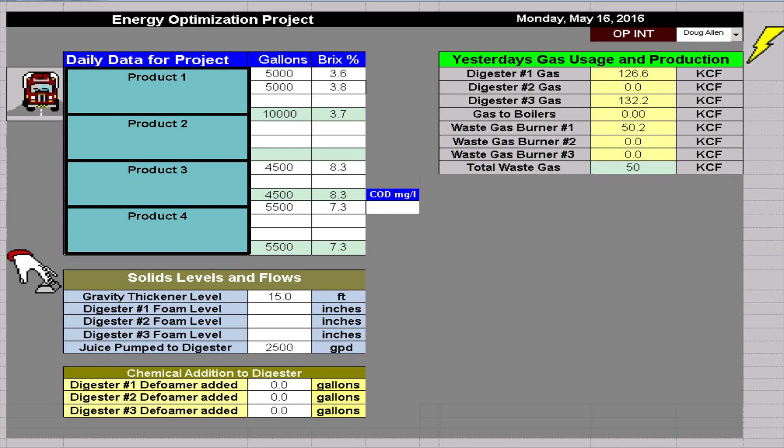You're not stealing them from us today because we have them hidden. But what we do is on the sugar water products, we will measure the brix. The brix is the sugar content, okay? And you can see that day was pretty darn good because it was so good some waste went out. Usually that doesn't happen, but I had to capture that for something else.

So one of the better things we've done in a while is when we did our last design for our greenfield plant, we went with membranes. Not as well as membrane treatment, but membrane thickening. A lot of people may have gone out to see this. If you haven't, we welcome you to come out and see it. It's a prized plant. We have headworks, we have wet weather storage, we have EQ.

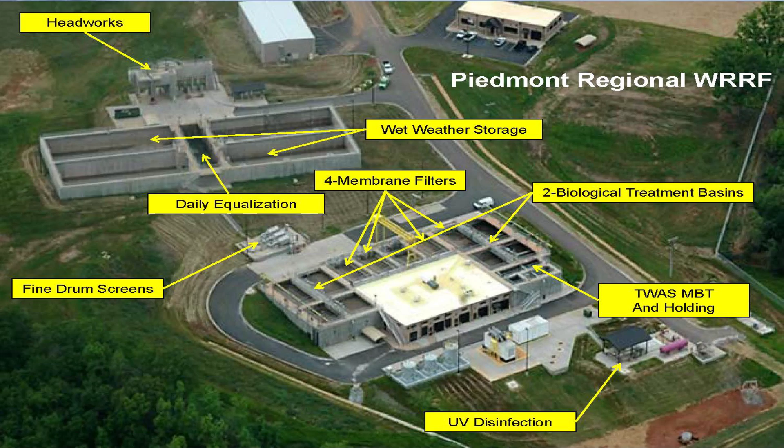Fine drum screens, and here is the magic we're going to talk about real briefly, the TWAS MBT and holding. Another shot of those things, and they're all in one building in one location, makes it really nice. Here's your TWAS thickening membrane, one cell. Here's your 4 membrane filtrations for your biological treatment. And this has been amazing.

Extremely clean. Drum screens are ahead of this that make that rescreening process, but this has been averaging since startup around 4%. Awesome. No chemicals, no labor involved. The plant is really a SCADA controlled system. Not a lot of labor there. Just high-techy guys, right?